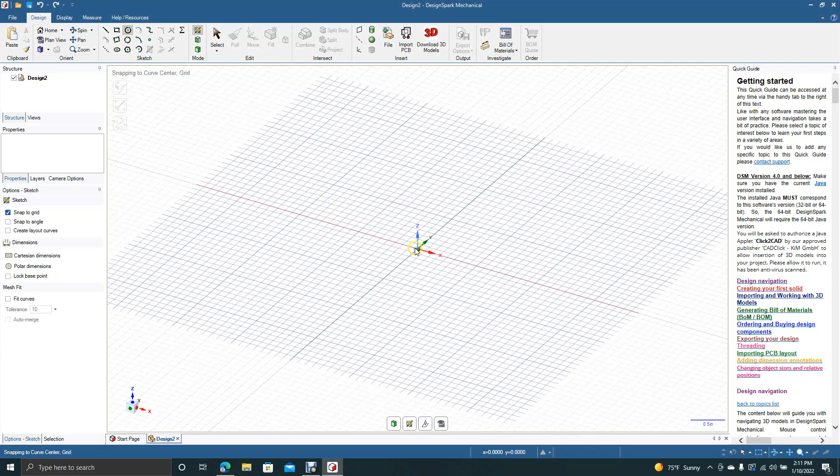We're going to click in the middle there. We're going to drag out a 2.5 inch circle. Then we're going to put one in the middle. We'll make that 1.25, and we'll click off.

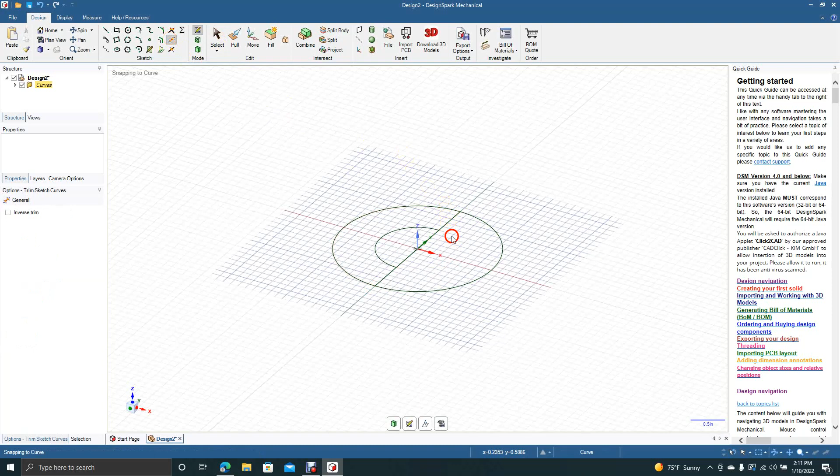And we're going to grab the line tool. We're going to split this, so we'll go from the center of the circle to the top of the circle. Select to click off. We'll grab our trim away tool. We're going to trim away both inner and outer dimensions, plus that middle piece.

Now we're going to go ahead and pull. We'll click on this, we'll pull this up 0.5. Okay, get a little piece like this.

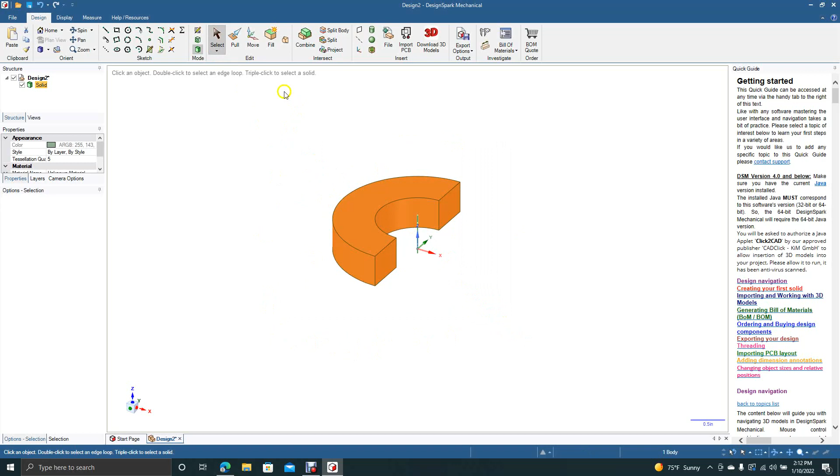Now we want to actually create two of these, so we're going to go ahead and select, drag a marquee around everything. We're going to go to move. While we're moving this, we're going to hold down... Actually, you know what? I can't do that. I did it once before, and now it's not letting me do that.

Okay, with it selected, we'll do copy and paste, so we get a second solid, and now we're going to move that solid up to 1 inch. Okay, now we'll go ahead and select and click off.

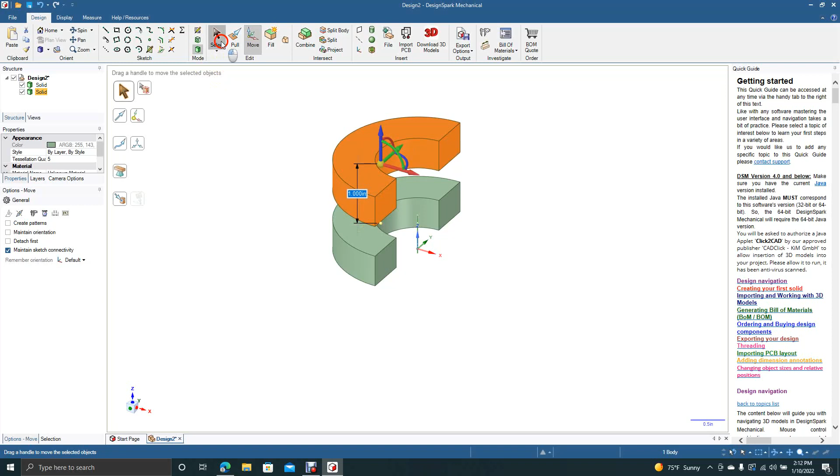Now we have these two pieces. So now we're going to go ahead and select all of these. We're going to Control C, Control V on the keyboard to copy and paste. Now we have 4 solids.

We're going to go ahead and say move to these. We're going to grab the red, we're going to move them over. Let's just move them over, type in 2.5.

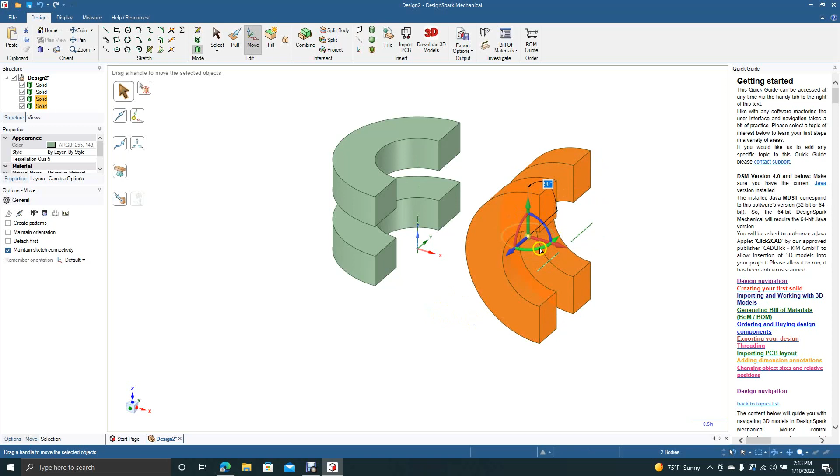Okay, now we're going to rotate these. So we need to rotate on the red. We'll turn this way, 90 degrees. And then we're going to go ahead and grab the green and we're going to spin these around to 180 degrees, which is a half circle.

Okay, now we're going to select and click off. So now we should have 4 solids over here. So now we're going to go ahead and spin this.

Okay, now what we want to do is using the blend tool, we're going to connect this over to here, this one over to the bottom one, and then these over to here like this.

So what we'll do first is we're going to go ahead and click on this blend tool. We're going to need to find the point, so we'll click there. The first one needs to go over to here, so we'll hold the control key down and click. Okay, we're going to get a line like that.

So we want to go ahead and check the green mark to complete it. Now with the blend still highlighted, we want to go ahead and click that surface. Then we have to spin around, grab the select tool, hold down the control key, and get that surface. Now we have to say blend, then hit the green check mark to accept. Okay, so that's the first one.

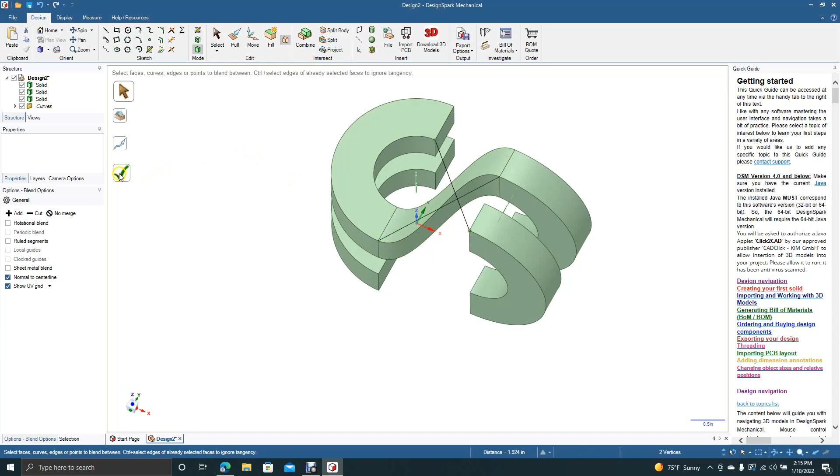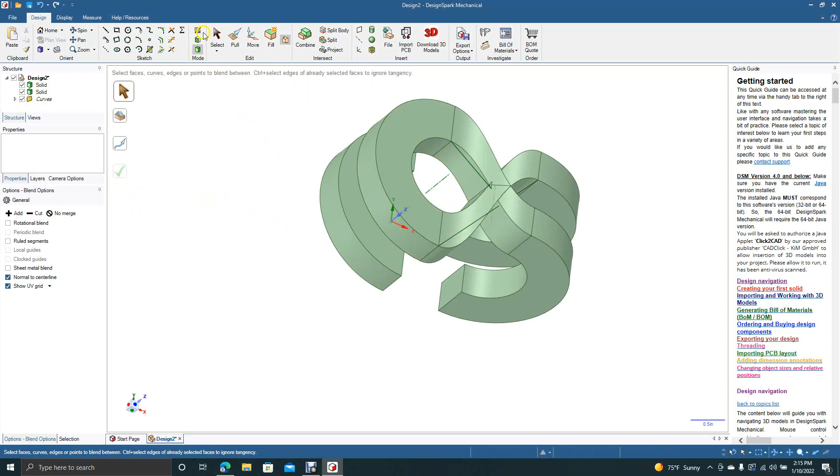On the second one, we want to do the same process. With that selected, click select, then click blend. Find that little endpoint, go from there, hold down the control key over there, and green check mark to accept. Then select this surface, spin it around, get the select tool, hold down the control key, get that one, and click blend. Then click green to accept. It goes right through the other blend, which is a function I really like.

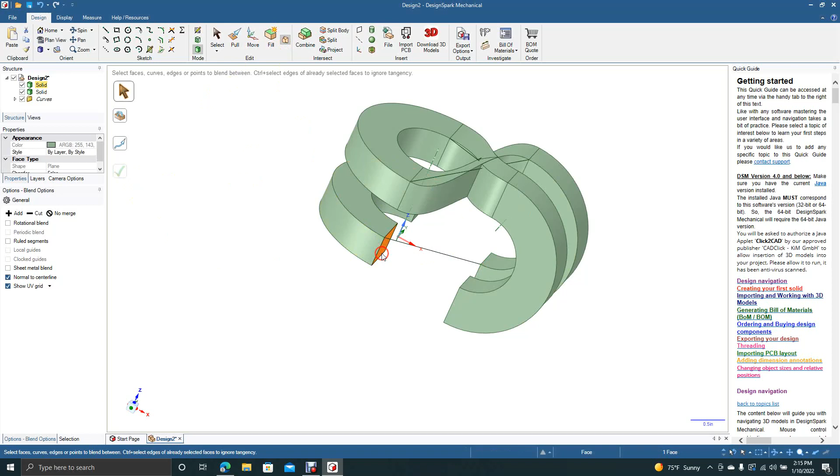Now we're going to do the same over here. Select the click off, blend. Grab this point here, go over to here, hold down the control key, green to accept. Then select that face, spin it, hold the shift key, hold the control key down, get that one, then go ahead and blend. Now we'll go green to accept.

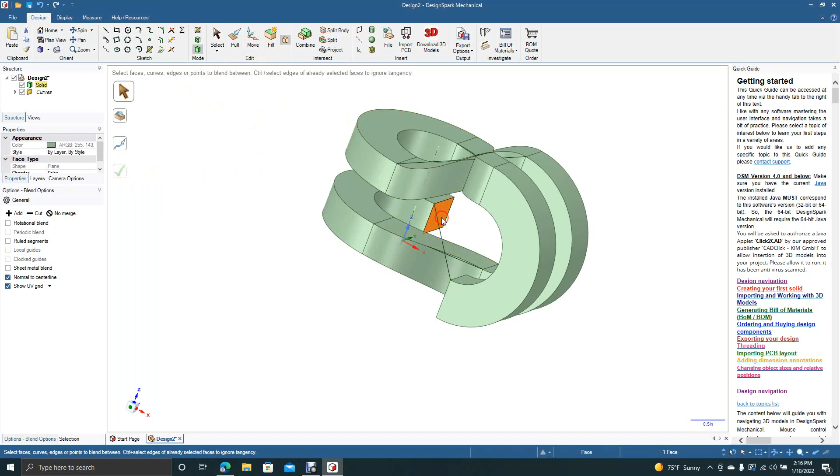Now we have one more to do. We want to come from there over to here, so we're going to go with the blend. Select the click off, click on the blend, go from that corner point, hold down the control key, that corner point, green check mark to accept. Now we're going to select that face, spin this hook around, get the select tool, select that one, and then we're going to blend. Now we go check mark to click off.

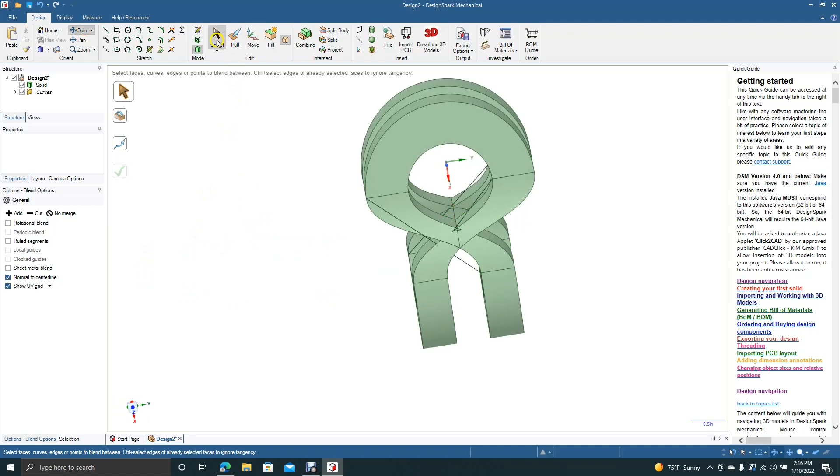Okay, now we're done with our little figure 8 hook. Looks pretty cool, and when you're done, you don't need these guides anymore. You can get rid of those, so just go ahead and click on those and delete. There should be 4 of them. Go ahead and spin - should be one more. Go ahead and get rid of that.

Okay, now it looks like we have - I guess that's all right - looks like we have a little bow tie there. Hopefully that won't be a problem, but what we can do now is go ahead and hold down the control key and start putting some radiuses in these.

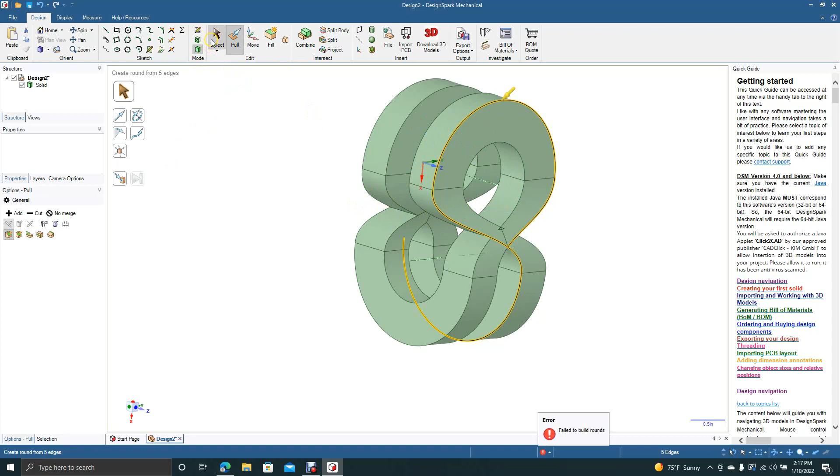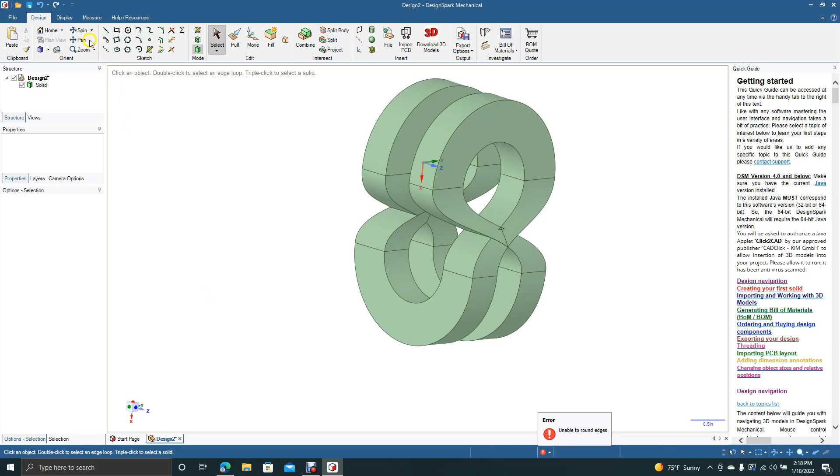Right now I'll just start off small, and you're going to let me put a radius in these. Let's just try one for now. Cool. It's being a little temperamental. Okay, it froze up, doesn't look like it's letting me add these fillets. I was able to add them last time. Let's try one more time. Looks like it's adding them, but it's just going really slow, so I'm going to leave them off for now.

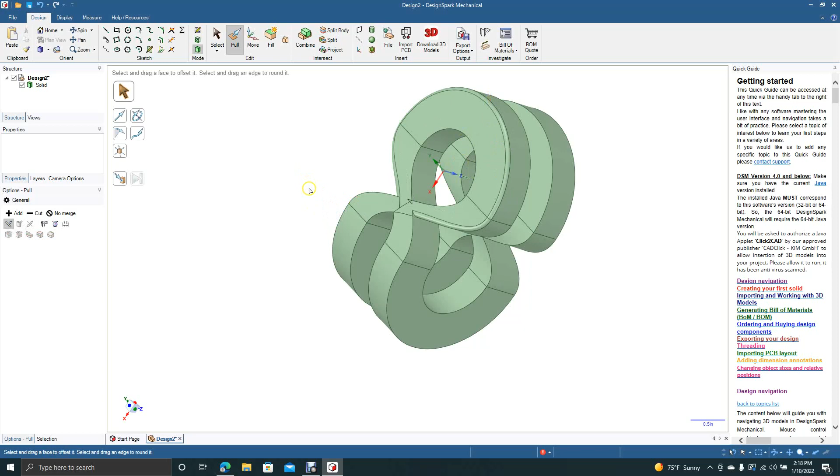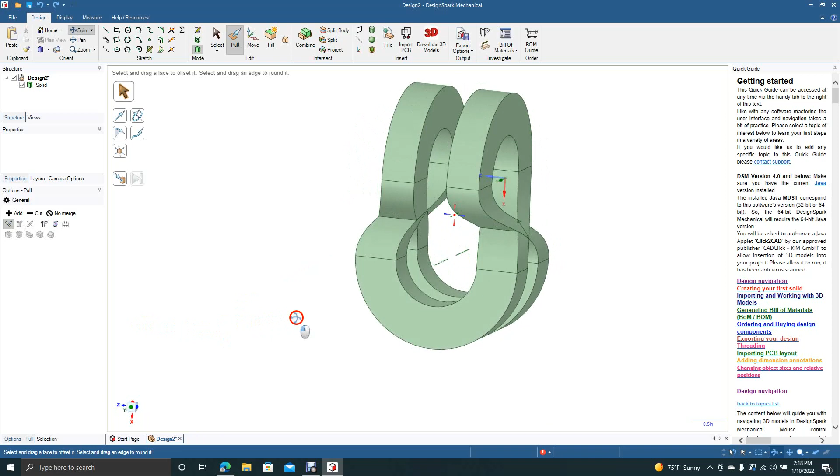This gives you the general idea of how to create a figure 8 hook. You could put a carabiner through here, and you could also put one through here. Of course, you'd have to print this with metal to make it substantial, but a lot of stuff you can do with the blend feature. It's very useful. This kind of shape you wouldn't have been able to create without using the blend feature.

Okay, that's going to end today's tutorial. Let's go ahead and go to top view on this. This is our figure 8 hook that we created primarily with a couple of shapes, round circles. We did some trimming, and then we created this with 4 blends and 4 guides.